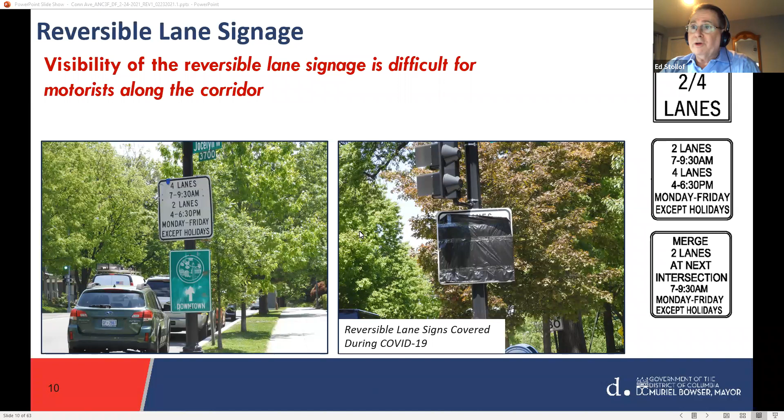Thank you, Charlotte. I'll continue with a little bit of background. One of the reasons for the study is looking at the reversible lane signage and the reversible lanes itself. A lot of folks have told us that the lane signage is difficult for motorists, the visibility to see the signs in the corridor. So you can see on the right, the reversible lane signs covered up during this pandemic period.

In terms of the roadway geometry, Connecticut Avenue is 110 to 140 feet right-of-way. The curb-to-curb width for Connecticut Avenue is 60 feet, and that consists of 6 travel lanes. In the morning, pre-COVID, we have 4 lanes going inbound and 2 lanes going outbound, and the reverse occurs during the evening rush hour, with 4 lanes going outbound and 2 lanes going inbound.

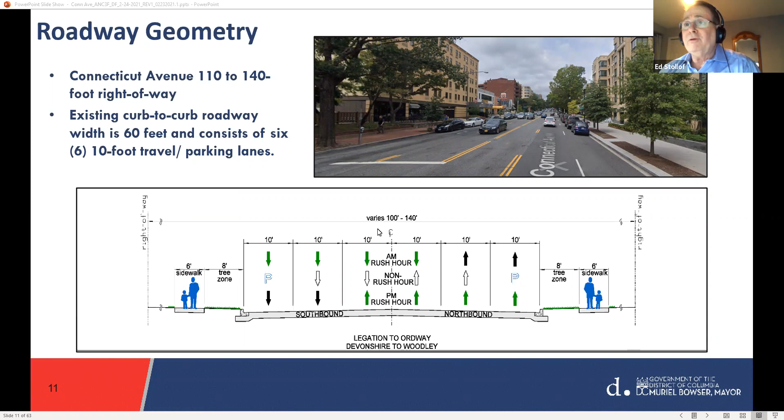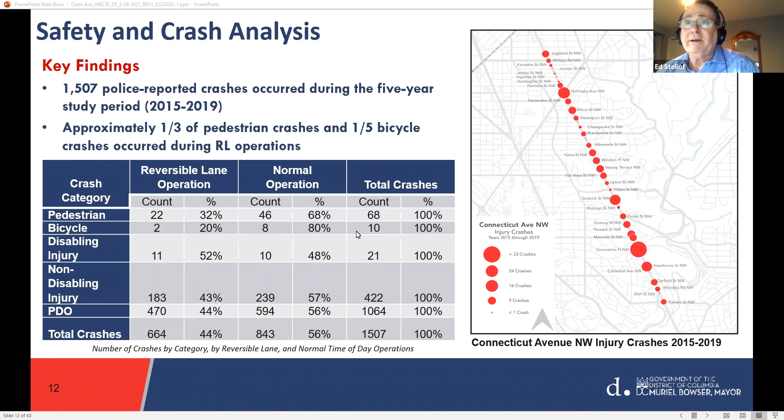We have a couple of slides on safety. We have about 1,500 police reported crashes during the 5-year period, starting with 2015 through 2019, about 300 per year. And although the reversible lanes are in effect 15% of the time, approximately 44% of the crashes occurred during the reversible lane operations.

As you can see on the right, we looked at other corridors, and Connecticut Avenue is kind of in the middle in terms of the average annual crash rates per million vehicle miles. Mass Avenue is pretty low at 4 here, and Georgia Avenue is much higher at 16. Connecticut Avenue is right in the middle of that graph.

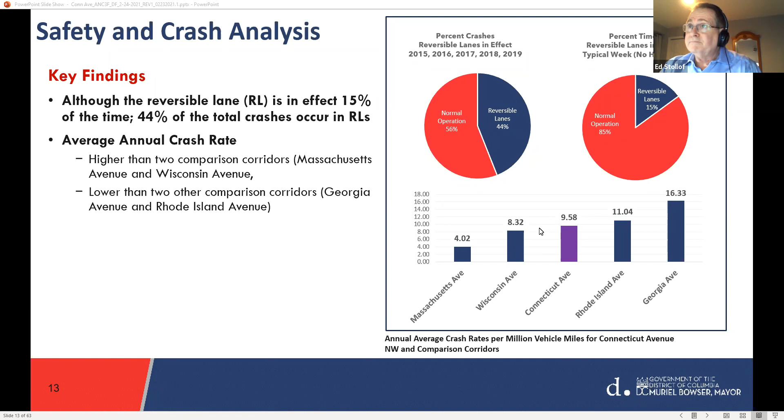In terms of average daily traffic volumes, we have 30 to 32,000 vehicles per day on Connecticut Avenue in the northern section, and around 24,000 vehicles per day on the southern section. I should let everybody know that we did a pandemic traffic count in December, and we found that the traffic is approximately 50% of what it was during pre-COVID conditions on the avenue.

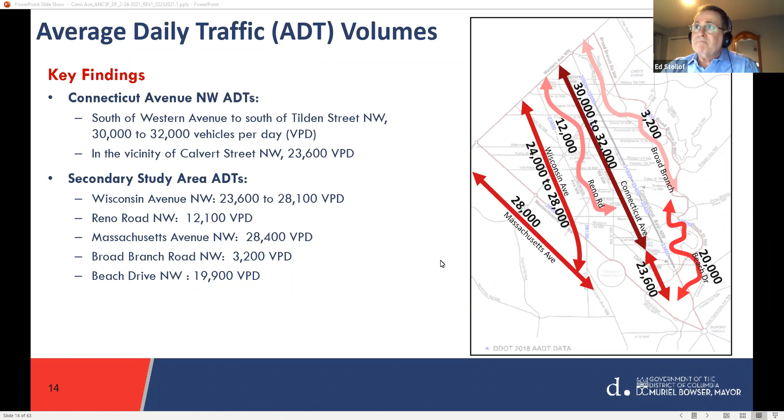This slide shows you the origins and destinations of vehicles traveling on Connecticut Avenue at selected locations. So north of Military we have the middle section, Van Ness to Upton, and then south of Calvert. I think the conclusion of this slide is that about 40 to 50% of the traffic on Connecticut Avenue today is through traffic, meaning traffic that has neither origin nor destination within our study area. The study area on the map is outlined in pink shading.

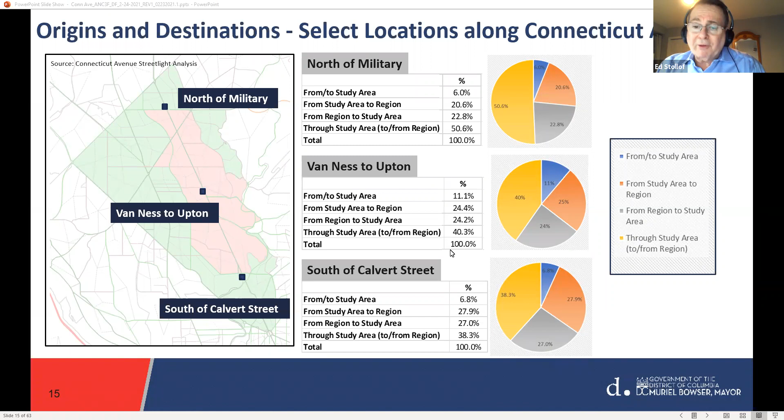Let me just stay for a moment so you can look at these statistics. So 40 to 50% of the traffic on Connecticut Avenue is through traffic. And I think that corroborates everyone's perceptions about the types of traffic that we've been told, at least during our public meetings.

Cynthia's going to talk a little bit about alternatives development right now, and then I'll follow it up afterwards with our evaluation.

This shows some of the guiding principles we've developed as part of this project, both as an additive to the project goals and as a way to help evaluate alternatives moving forward. Principles such as quality of life, accommodating people who live, work, and play along the corridor, especially corridor residents and businesses; understanding the implications of safety and Vision Zero, so reducing crashes and fatalities; realizing traffic operation mitigation, mitigating significant traffic impacts; retaining some level of parking and loading for businesses and commercial areas; and making this a multimodal corridor that supports safe access and travel for pedestrians, bicyclists, transit users, and motorists.

For the scope of this study, we are really looking at the 60-foot curb-to-curb cross-section, staying within that boundary for any alternatives we move forward with.

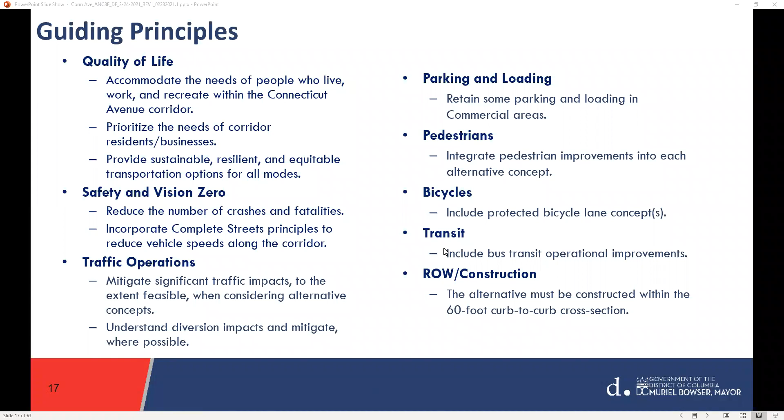We at DDOT started with 5 concepts, calling them 4 build concepts, A, B, C, and D, and a no-build concept. Over the last couple weeks and months, we've been talking more with the public and our community advisory committee, and some suggestions for additional alternatives have been added, so we'll go through D1, D2, and concept E as well. One thing to note: the concepts for no-build, A, and D0 would require MUTCD-compliant overhead signs, upgrading everything to be uniform in terms of traffic conditions and design. We did meet with the CFA, and they were not supportive of any overhead signage.

All concepts will be carried forward to our public meeting this March and April, regardless of which ones we did more specific traffic analysis for, which were the no-build, concept B, and C. However, all alternatives will include elements to improve safety and mobility, and we'll go through those appended elements toward the end.

I'll add that we are looking at a speed limit reduction along Connecticut Avenue, a posted speed limit from 30 miles per hour to 25 miles per hour. We haven't finished our analysis yet, but we'll let folks know in the weeks to come.

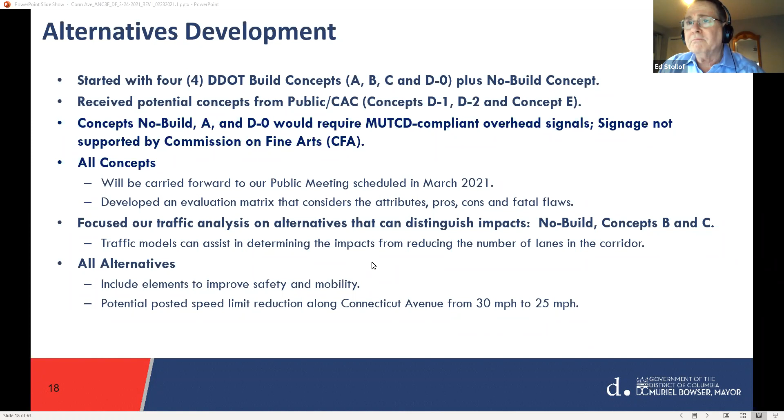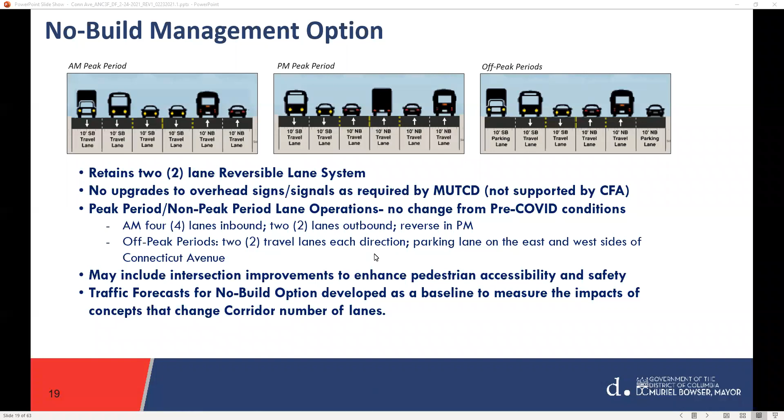Our first alternative is the no-build management option, which will be modeled as our base concept. It's similar traffic operations to pre-COVID conditions, where the 2-lane reversible lane system is retained, with no upgrades to overhead signals and signage. During the peak hour, it would be 4 lanes inbound in the AM and 2 lanes outbound, then reversed in the PM. During off-peak periods, there are 2 travel lanes in each direction with parking on both the east and west sides of Connecticut Avenue. This alternative could include opportunities for enhancing pedestrian safety and accessibility. The no-build option provides a baseline to measure the impacts of concepts moving forward.

This is a quick high-level sketch of cross-sections. On the left, the two cross-sections show AM and PM peak conditions with 4 lanes in the peak-hour direction and 2 lanes in the non-peak direction. On the right, the off-peak period cross-section shows 2 lanes in each direction with parking on both sides.

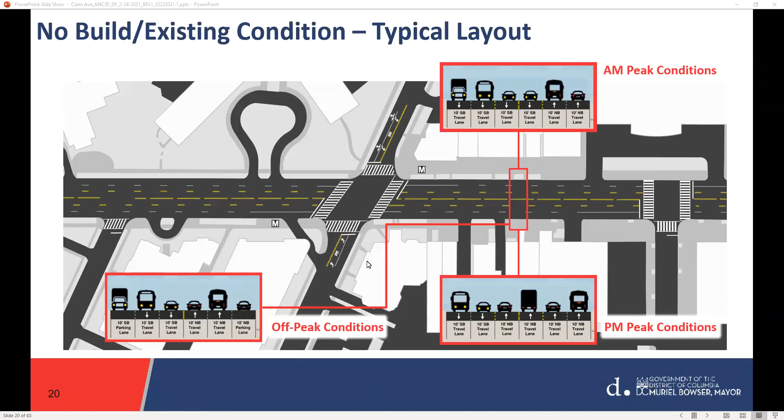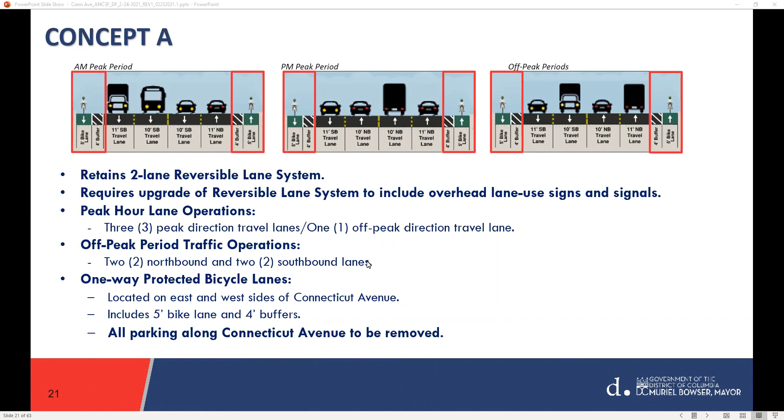Hello, this is Kyle, I have a question. Sure, go ahead. Okay, I'm going to continue.

We're not going to take questions until the end. Okay. Hey Cynthia, just keep going.

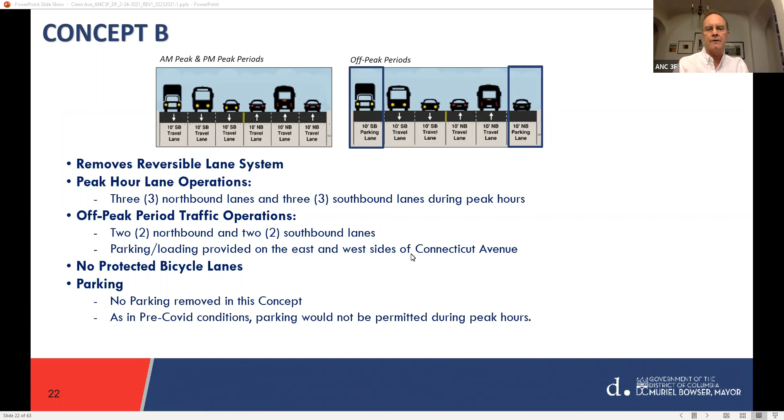Concept B removes the reversible lane, with 3 lanes northbound and 3 lanes southbound during the peak direction. During the off-peak period, there would be 2 northbound and 2 southbound lanes. Parking would be provided on the east and west sides of Connecticut Avenue. This concept does not provide any protected bike lane facilities, and no parking would be removed as part of this concept—parking would be allowed during off-peak periods, similar to pre-COVID conditions, but not during the peak hour.

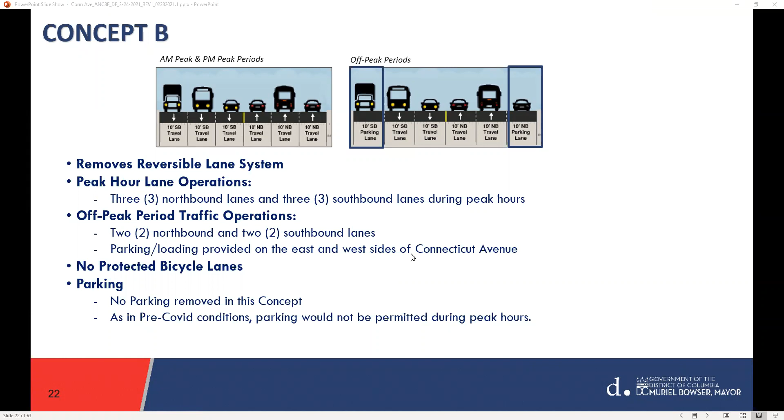This is showing the typical layout for concept B.

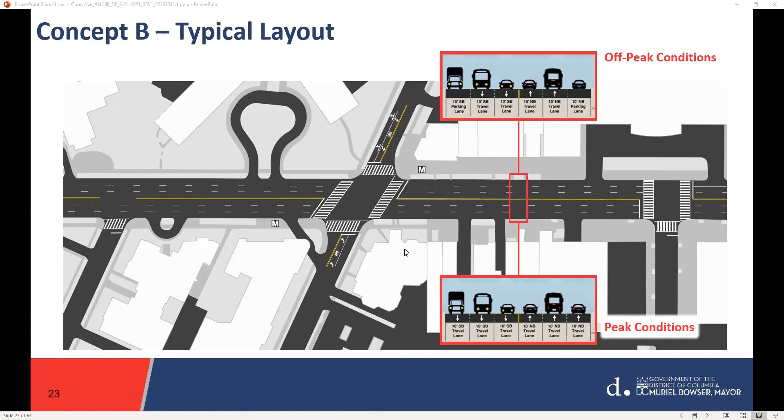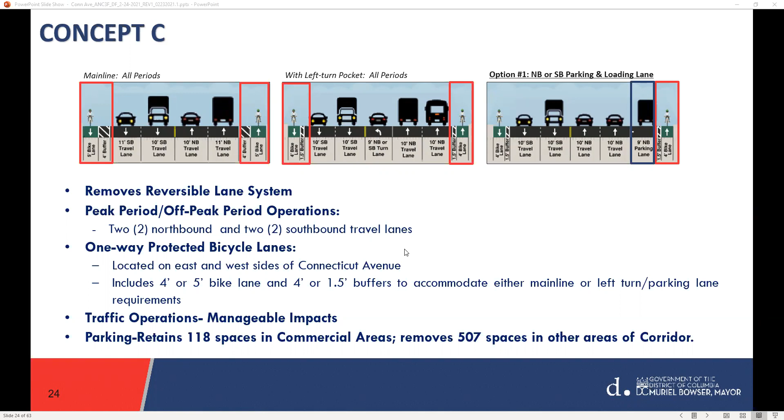This also accommodates the need for some left turn and parking lanes along the corridor as needed. In terms of traffic operations, it's pretty manageable based on our analysis. However, overall, parking would need to be removed along portions of the corridor outside of the commercial zones. Within the commercial study area, there'd be around 120 spaces where parking would be accommodated on one side of the street.

Next slide. This is showing cross sections of a typical layout for concept C. On the left, it's pretty consistent with 2 travel lanes in each direction with a buffered bike lane.

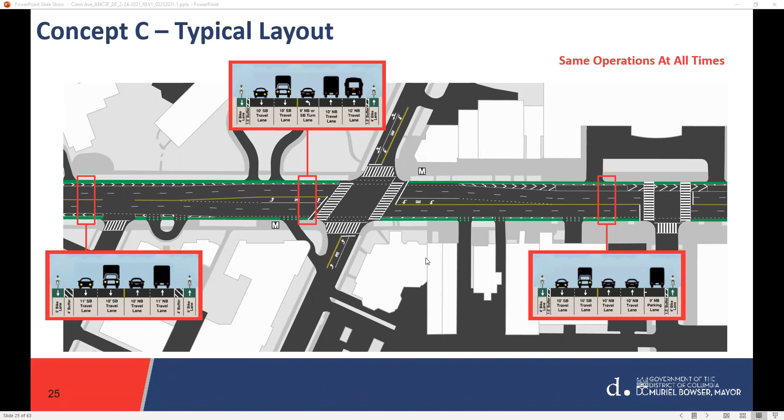As we move toward an intersection where we may need a left turn pocket, the buffered bike lane is skinnied up a little bit, and some width from the travel lanes is managed toward the center left turn lane. Then as we move toward commercial areas, such as the cross section on the right shows, that would look like accommodating parking on the north side or the east side, while keeping 2 travel lanes in each direction and a buffered bike lane.

Next slide. This is just showing a rendering of what that would look like. The image on the left is showing a bus floating island, or in this case a ZICLA, a type of facility where bicyclists and buses would help reduce the number of conflicts between the two. Buses would stop in lane and passengers would board and alight onto the ZICLA, while the bike lane itself would be skinnied up, and bicyclists would need to yield to people getting off the bus.

The image on the right is just showing another cross section where we're showing Porter and Connecticut, where there would be a left turn pocket as well, and no parking on this section.

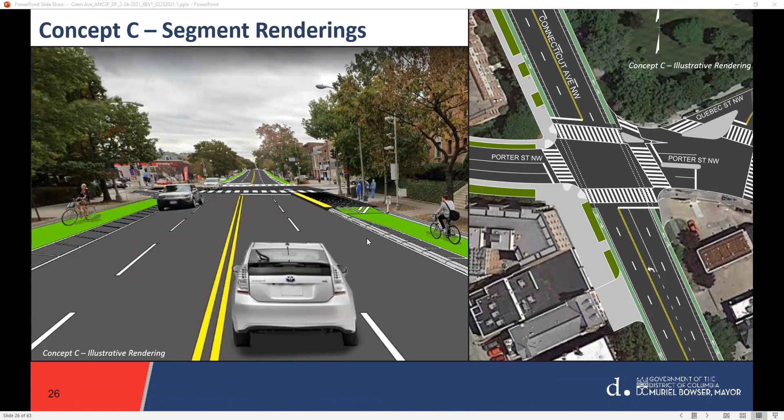This is just showing a more detailed look at what parking would look like in the commercial areas, showing it on the east side, where some of the width would be shifted from the bike lane and the buffer in the travel lane to the parking. One thing to note is that for the most part, we have accommodated parking in this concept on the east side of Connecticut, but there are some locations, especially near the zoo, where the parking is on the west side.

Next slide. And 24/7 parking would be all day parking. Yes, for concept C, it would be parking all day for the commercial areas.

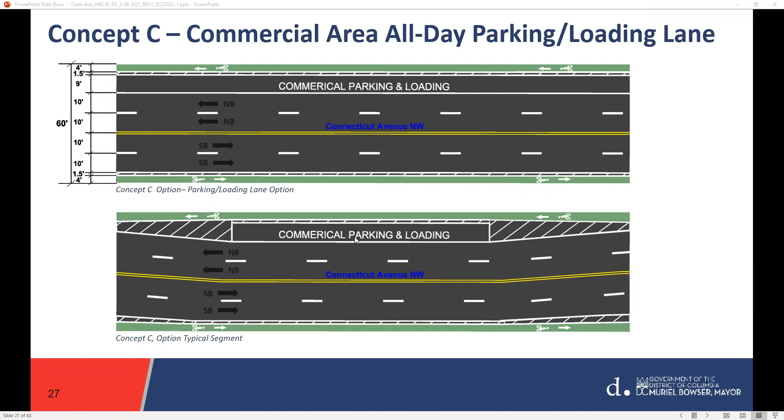Concept D is where we are showing a two-way protected cycle track on the west side of Connecticut Avenue. This would retain one reversible lane and would require upgrades to signals and signage. During peak hour operation, it'd be 3 peak travel lanes in the peak direction with 2 off-peak direction travel lanes. During the off-peak period, it'd be 2 northbound and 2 southbound travel lanes, with the opportunity to have parking and loading on the northbound side.

As part of our bicycle facility design guidelines, because there is a cycle track on the west side of Connecticut Avenue, we need to provide safe passing for both vehicles taking lefts and for the cycle track operations itself. Normally we would need a left turn pocket with protected phasing. However, this would not be constructible in this specific alternative because of the reversible lane, so that's definitely a flaw within this concept.

Other things to note are pedestrian and cyclist interactions; there may be some initial conflicts just because pedestrians aren't used to looking for cyclists in both directions. So that's something to know. Next slide.

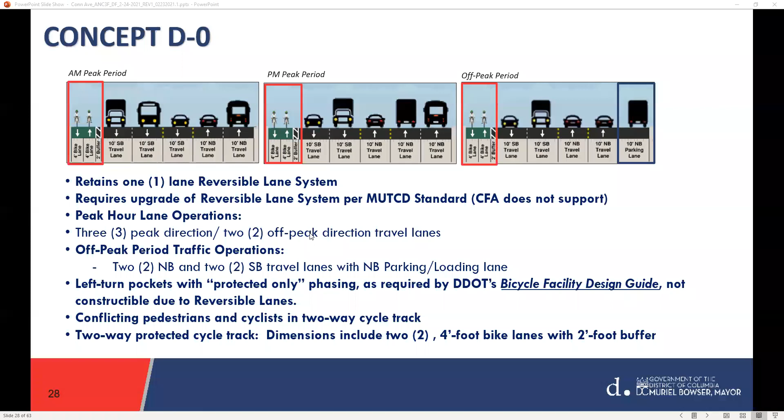Concept D1 is very similar, with the protected cycle track on the west side. This retains the reversible lane system, with traffic operations all day being 2 lanes northbound and 2 lanes southbound.

The two other options that would be added to this would be a northbound parking/loading lane, or a northbound-southbound left turn pocket. Similar to the other concept, left turn pockets would be needed to protect for protected-only phasing at all intersections. Due to that specific guideline, the default cross section would be more like the right cross section, where we'd need 2 travel lanes in locations requiring a left turn pocket. So parking might need to be reduced a little bit for this one.

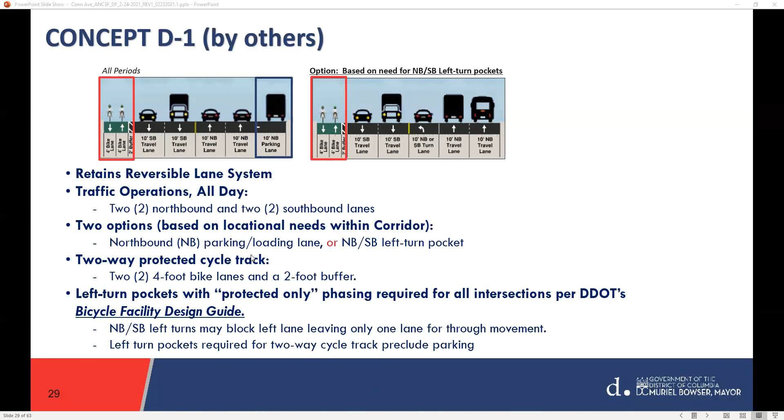Next slide. Concept D2 removes the reversible lane entirely. This shows 2 northbound and 2 southbound travel lanes with a 2-way center left turn lane during the peak period. During the off-peak period, there'd only be 1 northbound travel lane and 2 southbound travel lanes, still with a 2-way center left turn lane, northbound parking and loading lane, and a 2-way protected cycle track.

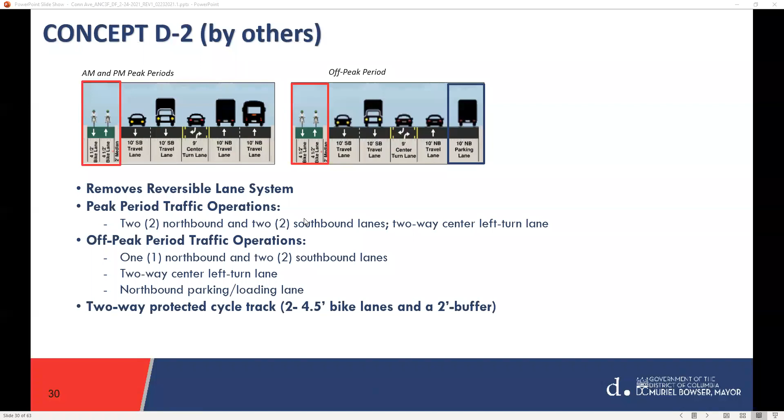Next slide. The last concept we'll go over is Concept E. This blends a lot of the options from before, removing the reversible lane entirely. However, during both peak and off-peak conditions, there would be 2 northbound and 2 southbound travel lanes, as well as parking and loading full-time on both sides of the street. This would also include a 2-way protected cycle track on the western side of Connecticut.

However, one of the major flaws of this concept is that it goes outside of our 60-foot right-of-way, requiring 67 feet, which doesn't conform to our guiding principles and is a fatal flaw. Because this project overlaps with the Cleveland Park Streetscape project, there are some design impacts where we aren't able to touch construction already completed as part of that project.

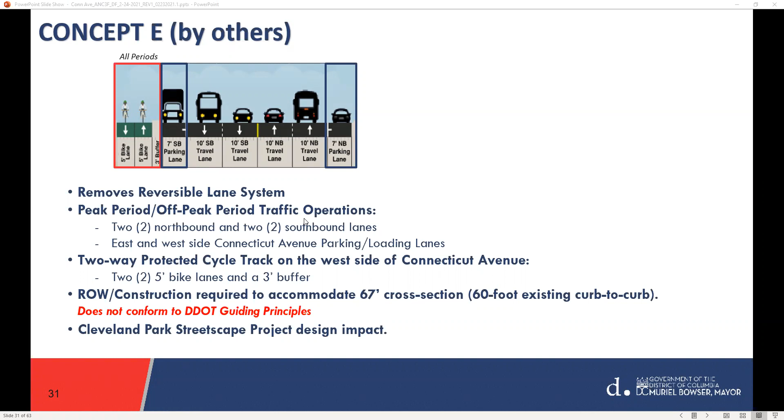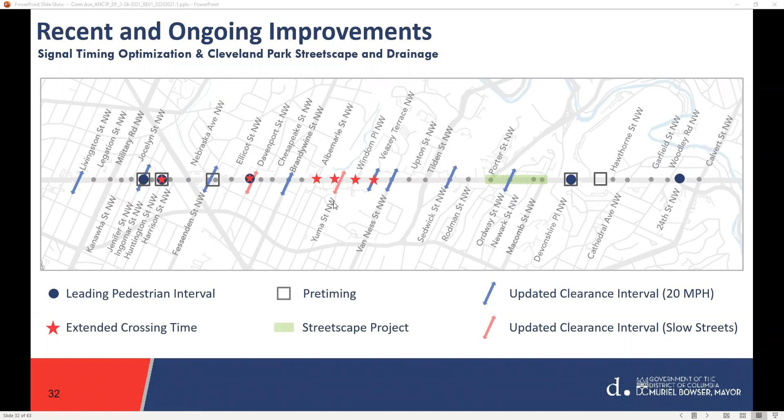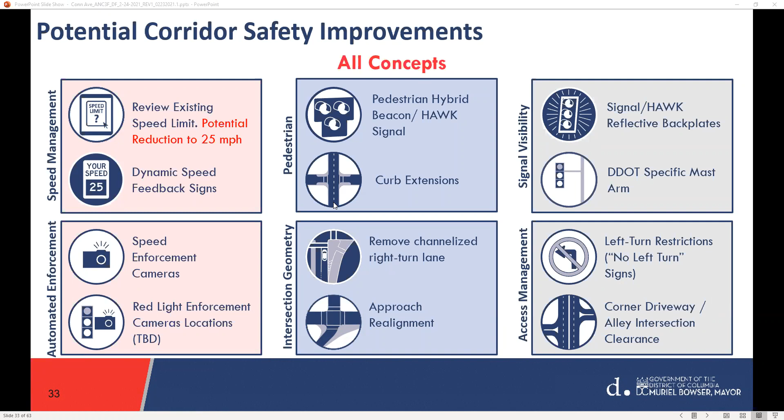As we wrapped up our analysis of the fatal flaws and pros and cons of each concept, we're finding that generally it's difficult for one concept to meet the full purpose and need. A number of concepts touch upon safety benefits and adding bike lanes, but there are trade-offs we're working through with both the community and DDOT interagency partners to balance the needs of all different modes and users.

We are moving forward with a no-build management option, and although it doesn't meet the purpose and need and retains the reversible lane system, it gives us a baseline to understand the impacts of other alternatives we'd be evaluating.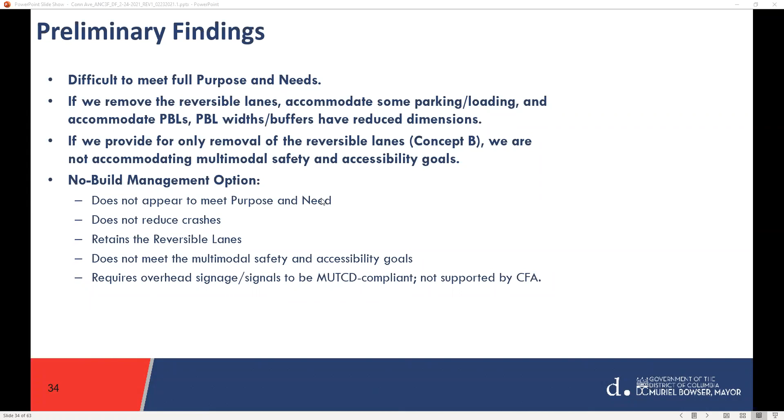All right, Ed, back to you.

Thanks, Cynthia. Appreciate it. I'm going to talk a little bit about our evaluation of some of these alternatives. We developed an evaluation matrix and did scoring from a +2 to a -2, desirable to not desirable scale. The criteria we looked at was pretty comprehensive: safety and operations, pedestrian, bicycle, and transit opportunities, accessibility and comfort, parking, loading, pickup and drop-off, and constructability and ability to implement an alternative.

Embedded in all of the evaluation criteria is consistency with District of Columbia plans: MoveDC, our Bicycle Master Plan, Vision Zero, our Sustainable DC 2.0 Plan, carbon neutrality goals, and the Bicycle and Pedestrian Safety Amendment Act of 2016. These plans are really embedded in the criteria we looked at.

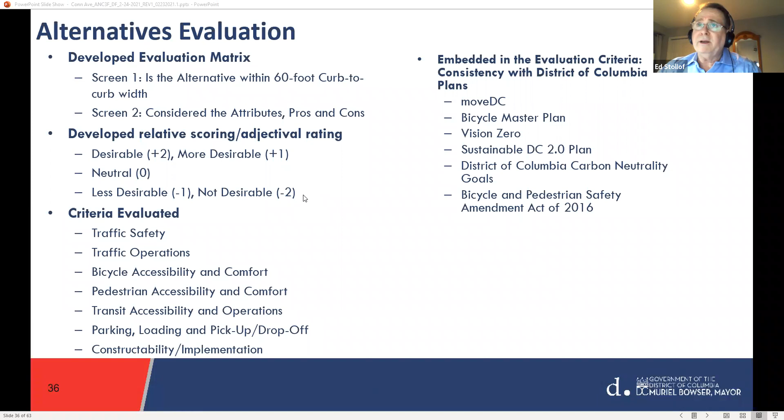We have a chart here. You can see the screen—one was the fatal flaw analysis. Basically Concept E was outside of the curb-to-curb width, so we're not going to look at that anymore. In terms of screen two, you can see the evaluation criteria in the columns, from traffic safety down to constructability and implementation.

And then we graded to the best of our ability each of the concepts against each of the evaluation criteria. And I think, as you can see, there's lots of negatives. The no build, concept A, concept D0, D1, and D2 are kind of in the negative category. And then concepts B and C kind of rose to the top, and they appear about equal in the plus column.

So I think these two concepts are rising to the top, and that's where we spent most of our effort looking at the impacts of these alternatives. The other alternatives appear to have major constraints, either traffic operational constraints, modal constraints, or implementation constraints that we thought would be too great to sustain.

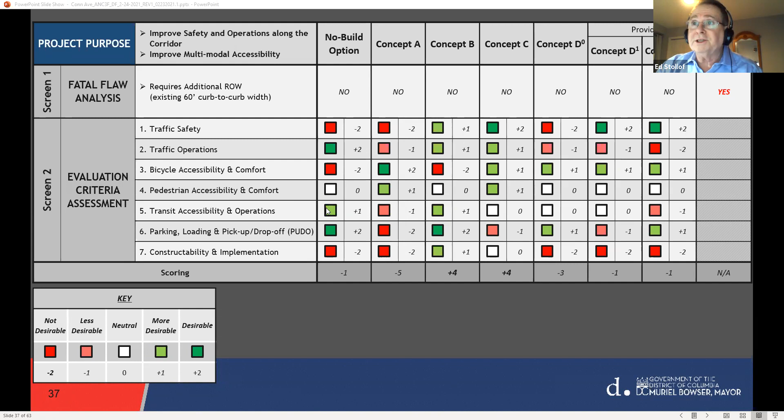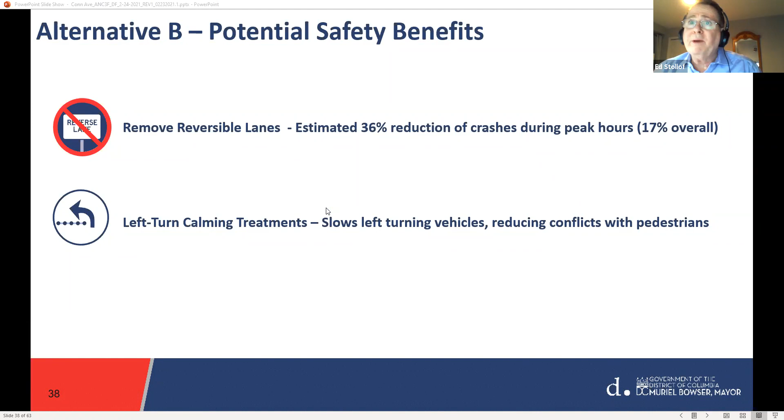In terms of alternative B, if we remove the reversible lanes, we believe we can reduce crashes overall by approximately 17%. You'll see the same number in concept C. So reversible lanes, removing that confusion, we believe a 17% reduction. We'll also get potential safety benefits from left turn calming treatments in alternative B.

And in alternative C, you can see the addition of protected bicycle lanes. What would happen there is traffic would slow generally, and so any crashes that would occur would be less severe. So less severe crashes and potentially a reduction in fatalities.

Adding turn lanes, other options for concept C we're looking at that would also have a positive safety benefit. That includes adding turn lanes, about a 27% reduction in crashes. Parking removals at intersections where there may be visibility problems - if you eliminate 1 or 2 spaces, you get a reduction in crashes because of increased visibility. And if we decide to put a pedestrian refuge island in, we believe that could help us out with about a 26% reduction of crashes at intersections with refuge islands. So it just gives you a range of possibilities.

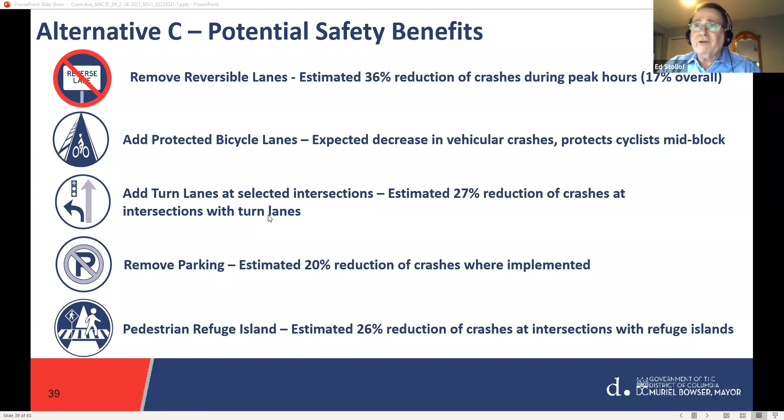In terms of parking, the total number of parking spaces in the corridor from Legation Street to Calvert Street is approximately 600. And we have approximately 24 loading spaces in the corridor.

In concept B, we take 0 spaces - there would be no parking spaces removed. In concept C, there would be approximately 500 spaces removed. But as Cynthia said, about 120 spaces we would essentially gain during the peak periods in the corridor, and then those spaces would remain all day long.

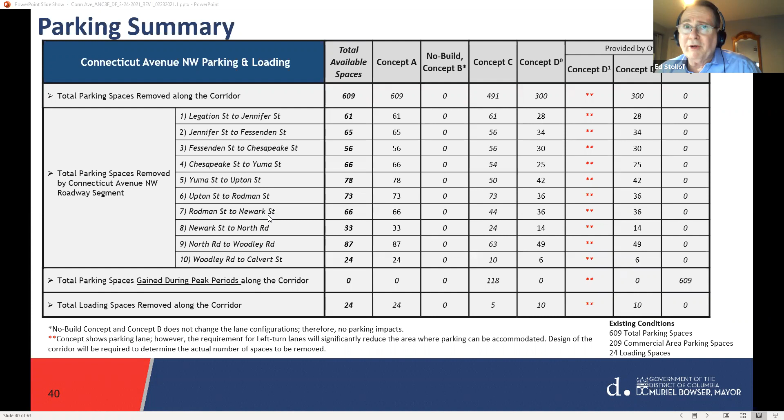In terms of traffic analysis, we focused on concept B and C. Why? The no build provides no changes in the pre-COVID configuration: 4 lanes southbound and 2 lanes northbound in the morning and the reverse in the evening. Concept B reduces the peak hour, peak direction lanes by 1. Concept C reduces the peak hour, peak direction lanes by 2.

We prepared a 2045 traffic volume forecast. That's our horizon year, consistent with the cooperative forecast for the Metropolitan Washington Council of Governments, and consistent with the land use, employment, and population estimates for DC and the region.

We've looked at potential traffic diversions, conducted capacity analysis, and looked at the relative travel time differences between each of the concepts. So the study and the model do not account for changes in traffic volumes on a year-to-year basis, like we're experiencing during the pandemic conditions.

What Michael Glickman will show in the capacity analysis is that the numbers we show are for the peak hours of the day. Other hours of the day would be much less, so that would be conservative. The model also has limitations in terms of modal change - if there's a capacity issue on a road, people will decide to change modes, but the model itself doesn't allow us to look at that. So the numbers that you see, I would view as conservative.

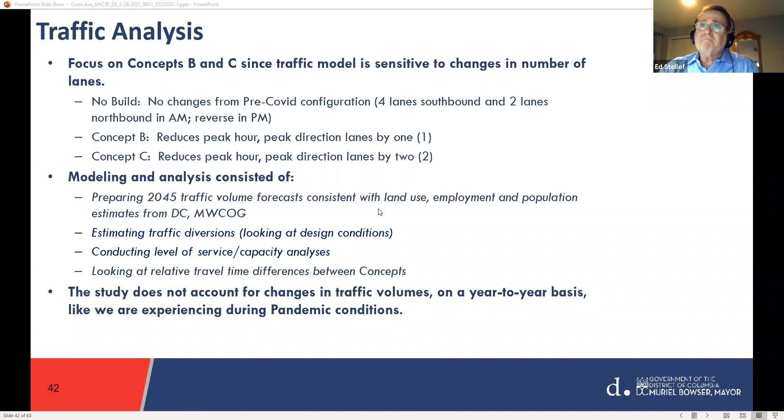Let's give you a couple of examples of existing and forecast AADTs - average annual daily traffic, your 24-hour traffic volume. As we said early in the presentation, there's around 24 to 32,000 vehicles per day on Connecticut Avenue. In the no build condition, 25 years from now, the model estimates we would increase traffic volumes. For example, looking at Albemarle Street to Porter Street, we'd go from about 32,000 to about 34,500 in the no build condition - that's if nothing was done.

In 2045 build concept B, where we're just providing three traffic lanes in each direction with no bike lanes, we would reduce traffic on Connecticut Avenue by approximately 2,000 to about 32,500. In concept C, we would further reduce that number to approximately 28,000. These reductions, either in B or C, are due to the diversion of trips in the corridor.

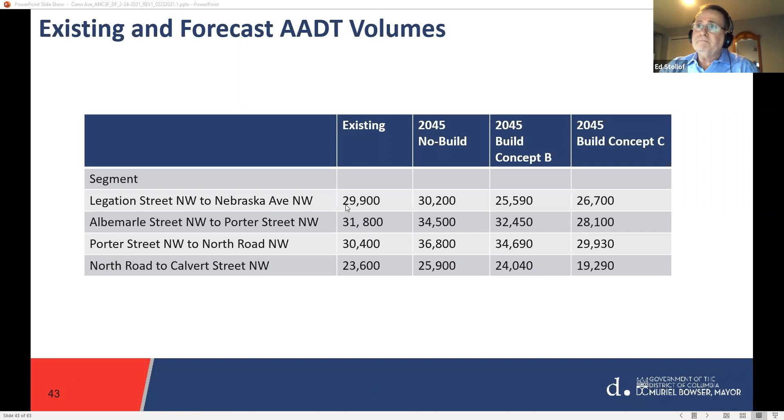This slide gives you an order of magnitude idea of the existing traffic volumes and forecasts. It's not all apples to apples, but it gives you a sense of what the different modes are having in terms of their volume.

For example, today we have 24 to 32,000 cars per day in vehicles. If we went to concept B, that would be 24 to 32,000, and concept C, 19,000 to about 30,000, depending upon where you are on the corridor.

In terms of buses today, we have approximately 4,300 patrons per day on the L1 and L2 routes in the corridor. In terms of metro, we have 3 metro stations along the corridor, and the entries range from about 3,700 to 6,000 persons per day entering those stations.

Bicycle, the last mode we're looking at, has around 30 to 90 bicycles per peak hour. If we forecast the AM and PM peak hours for bicycle with a protected bicycle lane, adding AM and PM together, it's about 1,000 bikers in the morning and afternoon. On a daily basis, it would be around 3,100 to 3,200. It just gives you the relative idea of the magnitude of each of the modes.

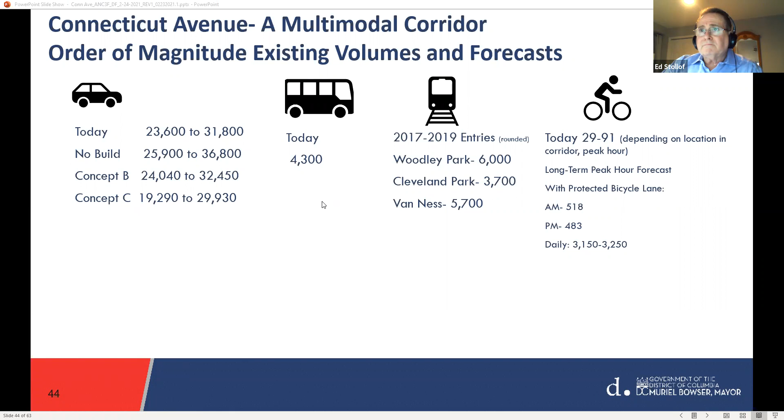I'll leave that up just for a second. I'm going to skip these slides. These provide our methodology for the bicycle forecast.

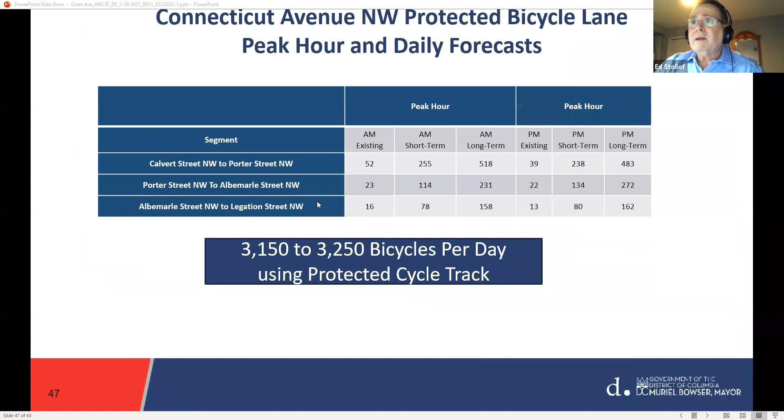Now I'm going to turn this presentation over to Michael Glickman, and Michael's going to talk a little bit about traffic diversion and the level of service and capacity along Connecticut Avenue. Thanks, Ed.

As Ed indicated, daily weekday traffic diversions were modeled for concepts B and C based on the 2045 no build volumes. A portion of the diversion will occur within the secondary study area, and others will be routed to regional facilities beyond the primary and secondary study areas. The daily diversions for concept B and C were then distributed over the 5-hour weekday morning period to account for inbound traffic diversions, and the 5-hour weekday afternoon period to account for outbound traffic diversions. Diversions are not expected to occur for the remaining 14 hours of the day.

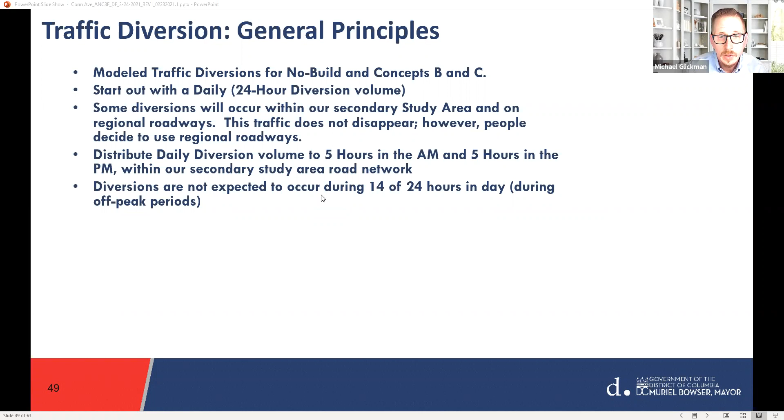Next slide, please. What we determined was that 55% to 60% of diversions will occur within the secondary study area, and 40 to 45% will occur along regional roadways such as Georgia Avenue, Clara Barton Parkway, Canal Road, I-495, MacArthur Boulevard, and George Washington Parkway.

As a result, of the 3,160 vehicle trips diverted under concept B, 1,920 will route to the secondary study area, and 1,240 would route to the regional roadways as described. Of the 7,020 vehicle trips diverted under concept C, 3,980 would route to the secondary study area, and the remaining 3,130 would route to regional roadways.

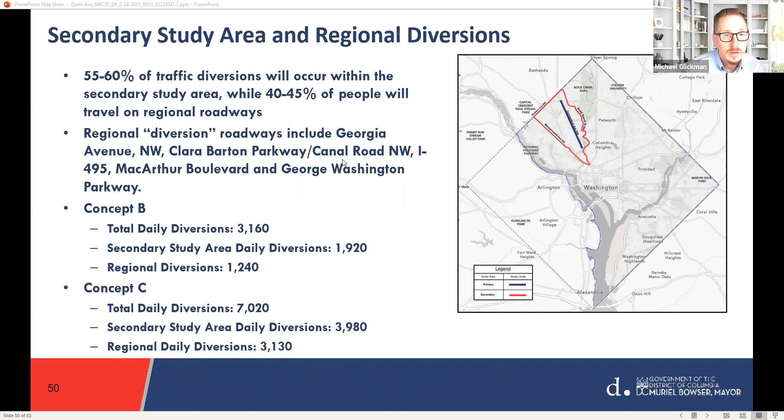Next slide, please. This slide represents diversions graphically using green lines to show decreases in peak hour volumes and blue lines to show increases in peak hour volumes. The lines are weighted based on the relative increase or decrease on a particular roadway. The blue and green numbers with the arrows represent the peak hour directional volumes along each of the primary and secondary study area corridors.

If you look at concept C, you can see how the blue line is thicker on certain north-south roads. It's more pronounced in concept C. Again, it's based on the volume of that road, so because Reno has a thicker line doesn't mean it has more diversion than Wisconsin Avenue. It just means as a percentage of the existing volume, that's why it's shown that way.

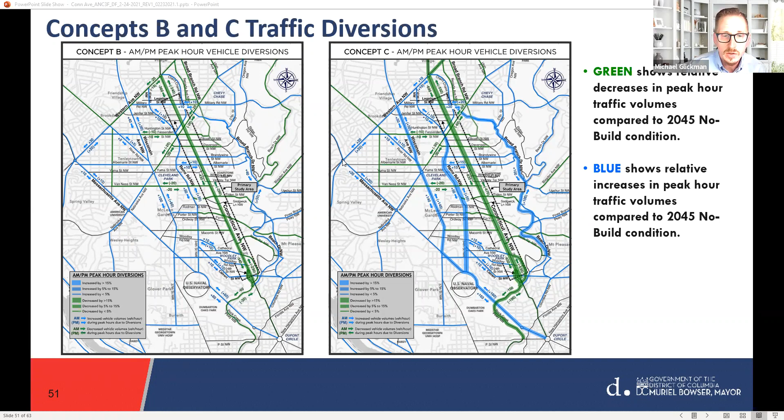Next slide, please. The purpose of this flow chart is to show how the peak hour diversions were calculated based on the total daily diversions for concept B and C. The white letters represent concept B and the blue letters represent concept C.

For example, you can see that the 3,160 ADT for concept B results in an increase of 100 vehicles in the peak direction of the highest peak hour along Wisconsin Avenue. Again, this volume was distributed over 5 hours in the peak direction, the peak period, so diversions would be incrementally less in the hours prior to and following the highest peak hour. Next slide, please.

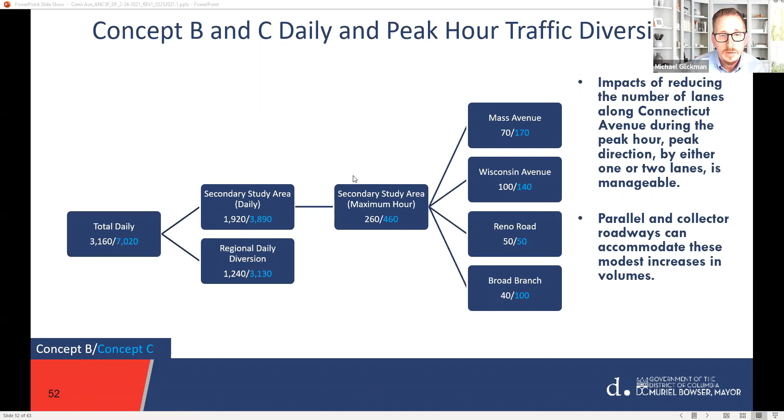So now we're going to get into our level of service analysis. For those not aware of the term level of service, it's a grading system from A to F based on vehicle delay through an intersection. LOS and delay are reported for the highest peak hour in the morning and the highest peak hour in the evening.

An intersection operating with under 55 seconds of delay is considered acceptable, denoted as level of service D or better. An intersection with 55 to 80 seconds of delay is level of service E, considered to be operating under constrained conditions. Level of service F theoretically applies above 80 seconds, but generally roadway users will adjust their routes to offset excessive delays. So really the purpose is to show the relative comparison between concept no build, concept B, and concept C.

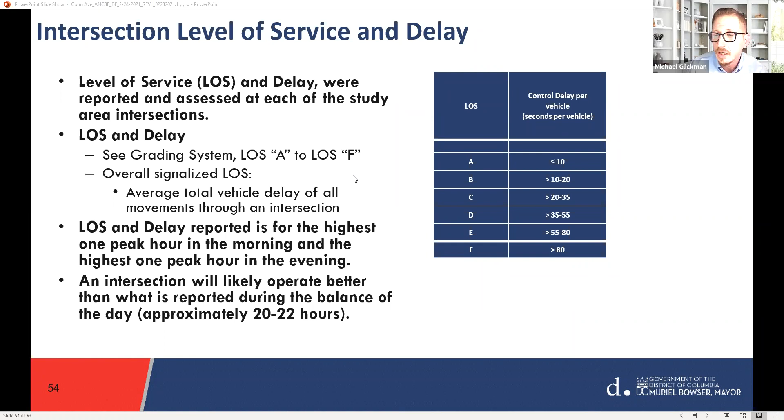Now we'll look at the AM peak hour within the primary study area, which is the area shown on this graphic, within the dashed lines along Connecticut Avenue. The most notable intersection is Nebraska and Connecticut Avenue, which operates under level of service F under all conditions analyzed. Down at Calvert, that intersection operates at level of service E for all conditions. The other intersections shown vary depending on the concept - some may slightly get better from E to D or slightly worse from D to E. If you look at the table shown, each of the concepts has just one intersection under the AM peak hour within the primary study area at level of service F.

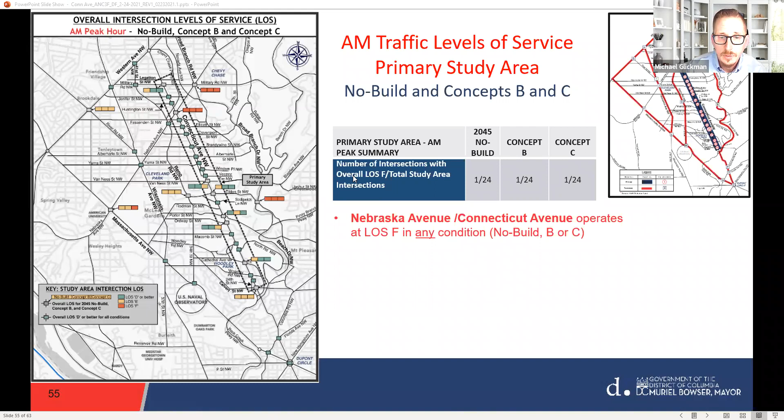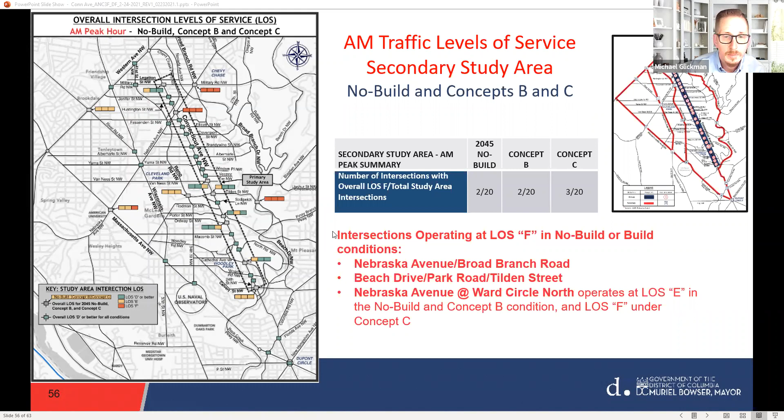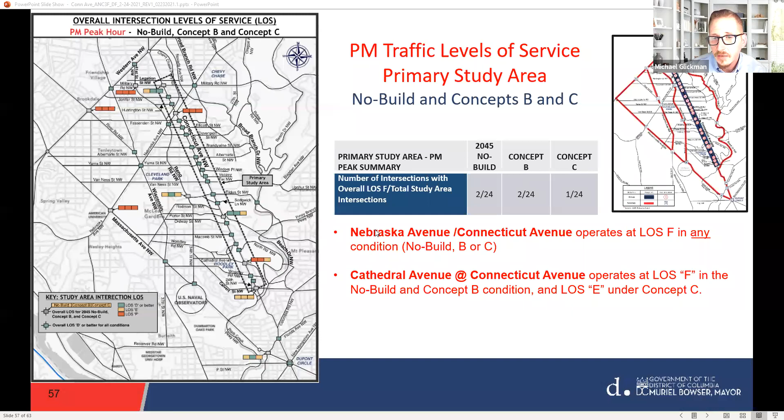Now we'll move on to the PM peak hour of the primary study area, again the area inside the box. Nebraska Avenue and Connecticut again operates at level of service F for all conditions. But one note is the intersection of Cathedral and Connecticut actually improves from F to E between concept C and the no build condition. If you look at the table here, concept C has 1 less intersection with level of service F than the no build and concept B.

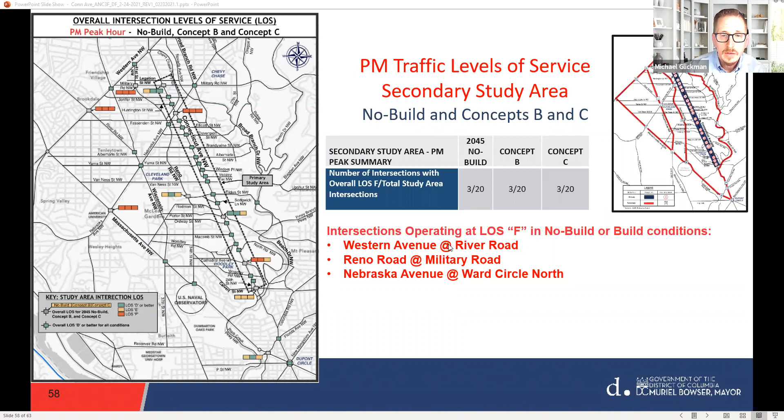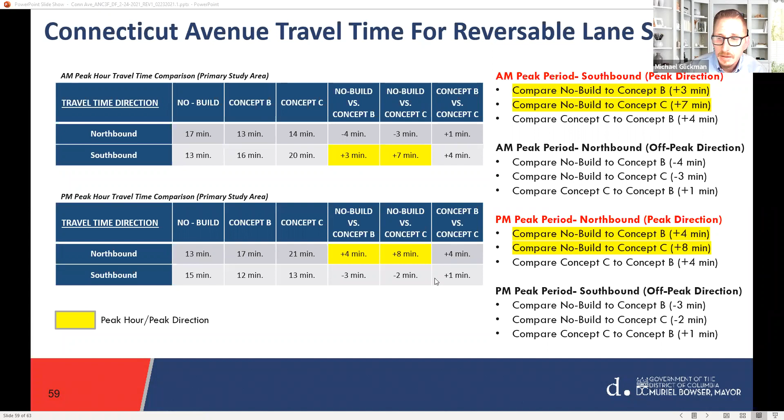So just a few next steps. We are presenting these findings of our traffic analysis and other evaluation elements to our stakeholders and interagency groups this month. We're preparing for a public meeting on March 30th and April 1st, as Charlotte said. We'll hold that public meeting, gather testimony and comments from stakeholders and the public, and develop a recommendation for moving forward if we have a preferred concept. If we have a preferred concept, we'd do a 10% conceptual design and then go through subsequent environmental documentation.

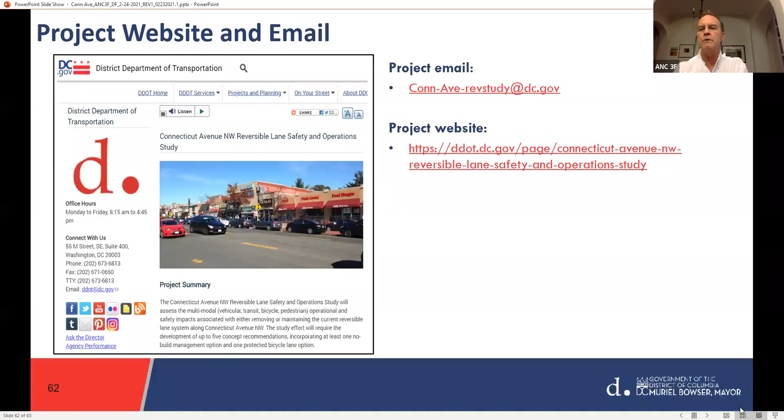Sure. I really want to thank you, Michael, and Cynthia for the presentation. It's a lot of information, and some of us, as you showed the slide earlier with the folks on the Citizens Advisory Committee, there's myself, Bob Dealing, and I think Eileen McCarthy, several of us are on this call tonight and have been with you. Tonight's intention was really to have you present where you are, what you've been thinking, what the alternatives are. Now it's really for us as ANC 3F, and I think all my fellow commissioners are on board tonight, and Bob Dealing's on, to listen and take questions.

I know there's been a number of questions in the chat that I think Bob Dealing has been tracking. For the remainder of the meeting, whether it's 30, 45 minutes, we can take questions. And I think we'll wrap up talking about our process with ANC3, what we're going to be doing next.

Because Ed, as you asked us, what's our vision? I think 3F put forth a resolution a couple years ago really wanting this study, wanting alternatives, wanting to make Connecticut Avenue a better street. And I think that's consistent with other ANCs up and down the corridor, because this is essentially our main street for much of us. So how do we make it safer? How do we make it more accessible to more people? How do we open up to more modes of transportation? For example, how do we get bikes and scooters off the sidewalks? They won't get off the sidewalks until there's a safe space in the street for them to do that. I'll stop there.

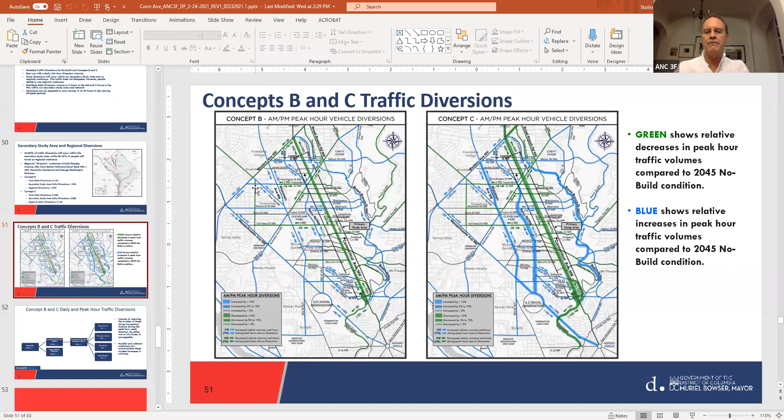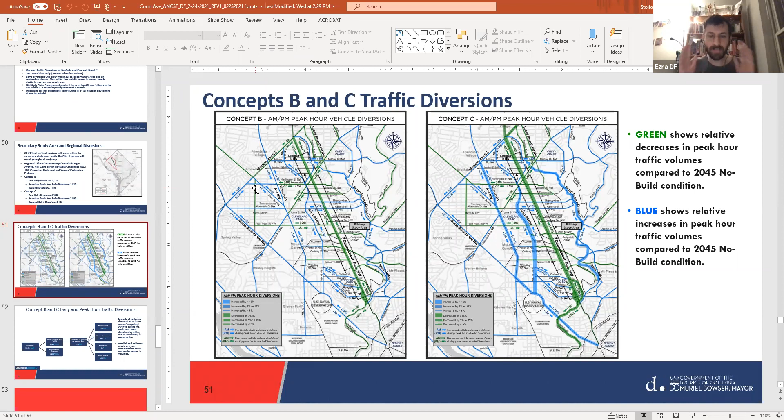Hello, everyone. My name is Ezra. I am not in Ward 3, but my parents live in Ward 3. I'm in 3F, just by the Van Ness Metro. So I bike on Connecticut Avenue quite a lot to go see them and to go home. And I usually take a longer route that puts me on Connecticut longer in order to avoid the extremely steep hills on Tilden and Porter. So I think that's just something to be aware of. That's especially true for newer cyclists who aren't able to bike up those hills and end up on Connecticut longer. So a safer way for them to bike would be better.

So I want to thank the DDOT team for having this meeting and similar meetings 3 nights in a row. I appreciate that work, and I appreciate that you're looking into ways to improve Connecticut Avenue. And Ed, I think at the end of your presentation, you asked us about how we envision Connecticut Avenue over the next 25 years. I think that's sort of inspired me to think about how often it is that we have the chance to improve and rethink our streets like this. And I guess my question is, if we don't take this opportunity to make Connecticut Avenue safer and to put in protected bike lanes, how long do you think it will be before the chance comes again?

I can't answer that question. I know the easy route would be to just modify the reversible lanes.

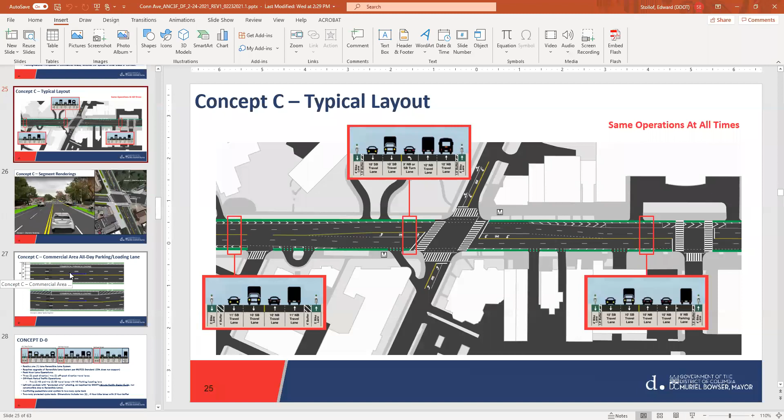There will be something within the buffer area through the parking segment. So you see that box to the right - where there's parking, the bike lane is behind the parking, and then there's a narrower buffer. So it is - the 1.5 feet is wide enough to include a treatment. We could use bollards, there may be other options, and that's something we're going to work through with the active transportation group within DDOT. We have not worked out all those details yet, but the intent is to protect the bike lanes.

Yeah, great. And if I can ask one more - oh sorry, Ed, go ahead. I was just going to say, Cynthia used the word skinnied, and we just want to note there is a trade-off here: these buffers are not as wide as we would normally want them to be. So if we're going to provide parking, then there's a trade-off with the width of the buffer.

Michael or Paul, if I could just ask a follow-up - is it possible to combine the two bike lanes onto one side of the road so that the buffer would go from the skinny 1.5 feet to maybe a fatter 3 feet? Are you talking about one of our alternatives, like Concept D, that has two-way bike lanes on the west side of the street, something like that? Yeah, I guess something like that.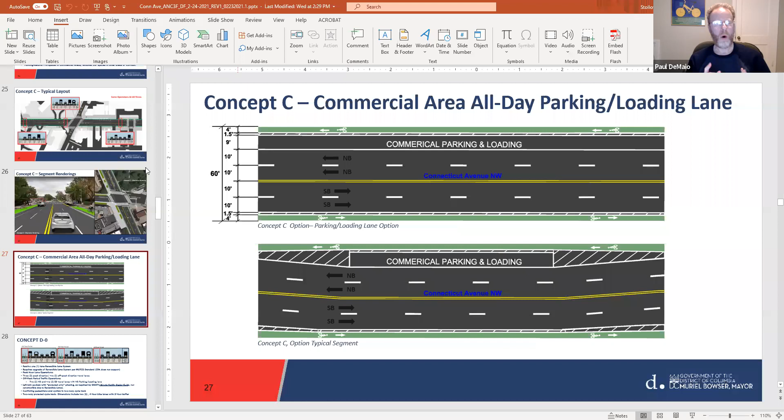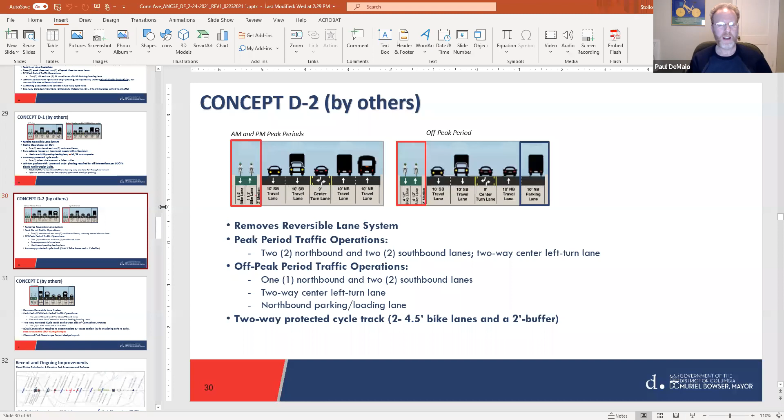I know D2 in particular had an issue with only one travel lane northbound during non-peak periods. So maybe there would be a solution of having more safety, more protection for 4-year-old to 80-year-old, 90-year-old cyclists in the bike lane.

I can tell you that our traffic engineering and signals division is pretty much against one lane in this off-peak period. It's not just traffic capacity, but emergency vehicle access, trucks that might have to make deliveries - it's a lot of things. So it's not just the numbers, it's the what-if something happens and we're down to cars backing up where one lane is blocked. So I think that's one of the major flaws of Concept D2.

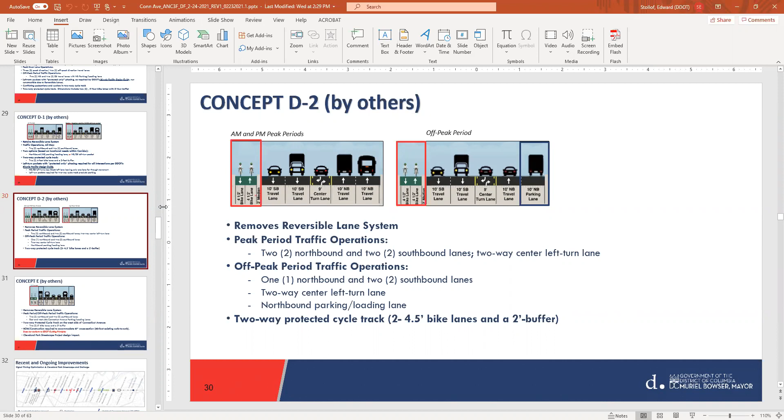And just to follow up on that, if you were to show, I think it's D1 would be the option, it's the one right before it. That also has the next one. There you go. So this one is one that we had two-way.

We showed a two-way cycle track with the option for either parking or the left turn. But the issue is that for a two-way cycle track, the requirement is that a left turn pocket has to be provided at every intersection, whereas on a one-way, it's only intersections with volumes greater than 50 vehicles. So it really puts us in a box trying to make that work.

So in other words, essentially what this means is the option shown on the right would be the default versus the one shown on the left. So it just makes retaining any parking problematic.

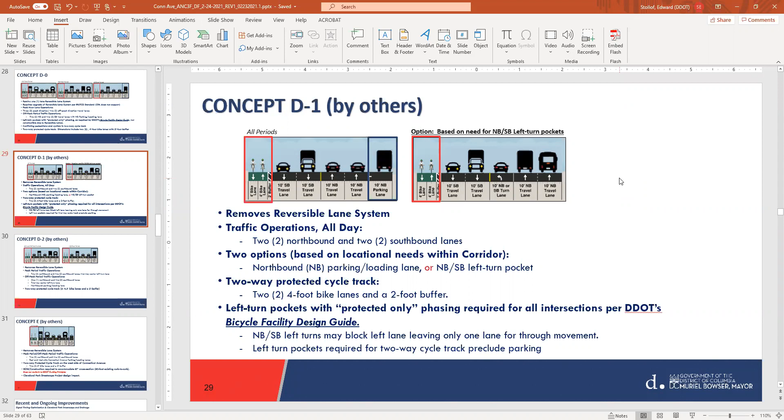Thank you. So David, I think there's two questions in the chat. One I saw from Josh Rising, I thought it might have been answered, but let's give Josh a shot. And there was one other question further up, essentially about if C is the choice, what's the timing on that in terms of being implemented from once the decision is made to when we could get protected bike lanes. So Josh, you're up first.

Great, yes, and thanks again to DDOT for all this. My question was, if option C were selected, but then the bike lane stops at Legation, and you said you'd need to assess going forward, I was wondering, does that require another study, or can that be done more expeditiously than the current timeline, which is a multi-year timeline? And then that'll segue nicely into the timing question that's out there too.

Yeah, I think that once we assess everyone's comments and testimony after the March-April meeting, if we decide to go forward, we would include those additional studies in our 10% conceptual design. So we would go forth with additional parking analysis and traffic analysis to the extent that we would potentially extend it up to or near the Chevy Chase Circle.

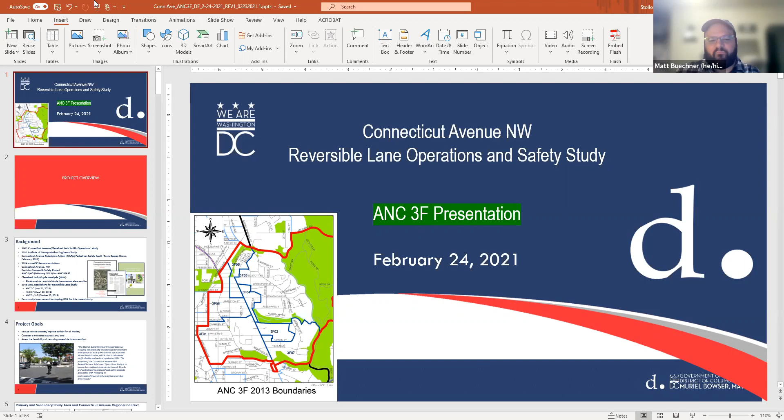Thanks, Matt. Thanks, Bob. Yeah, thanks. So is this the time where we go out for drinks now? Yeah, this is the post-meeting networking. I know, we can't do that these days. We're not in the before times, as they say. Yes, at some point in the future. I hope you had a good bike ride today. I did, it was fun. Good.